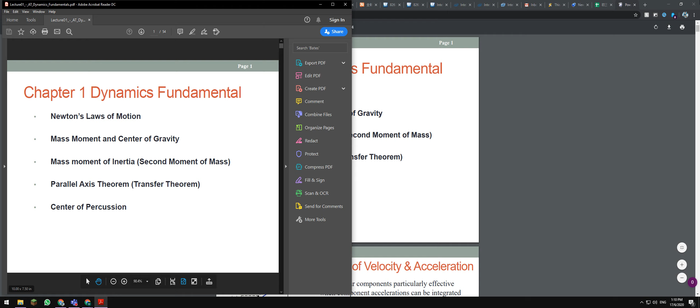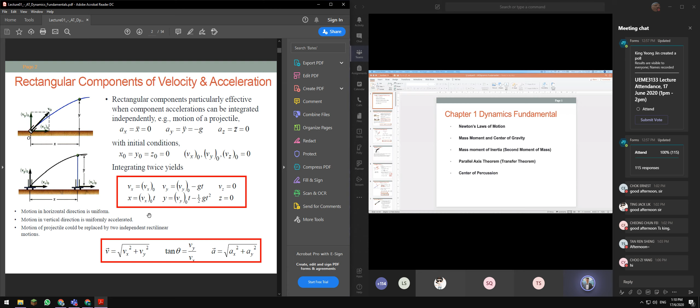Okay, so now how many do we have? 118. Okay, so we will go into our lecture 1 now. I will turn off my video just to minimize the interference. Okay. So we'll go to topic 1 now. At the same time, let me start the recording as well. Okay, this starts. Okay, so we started our recording.

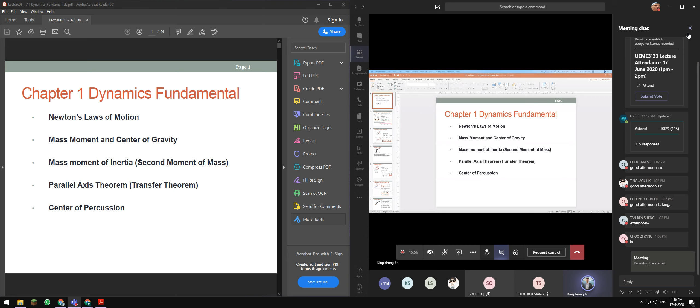Okay, so we will start with our topic 1 here. We start with the dynamics fundamentals. This is actually extracted from your dynamics course, because I believe dynamics is your year 1 subject, and some of you already learned it from the lecturers. So we can have some quick revision, because we will be using this again. So we will start with the dynamics fundamentals, then we will go to the introduction of linkages.

So let's see. Okay. So we will look at Newton's laws of motion. Maybe I activated my pen. Okay. So we will look at Newton's laws of motion. Okay. There is some technical issue now. Let me settle it first. Sorry for that.

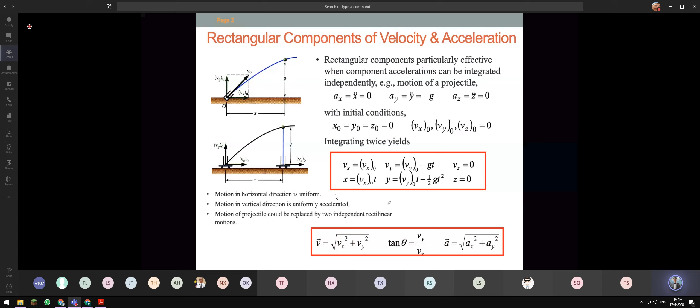Motion in the vertical direction is uniformly accelerated, that's why we have this gravitational effect. And the motion of a projectile can be replaced by two independent rectilinear motions, meaning x and y, which we solve independently. So this is what we have for projectile.

Next we'll look at the tangential and normal components. This will be very useful in our linkages, so please pay attention. We learned this in dynamics as well. When a particle moves with a constant distance from a point C, we will be able to find the relation between its velocity and acceleration. The velocity vector for the point P is V, or we can write it as V e_t, where t represents the tangential component.

So it means that if the radius here is constant, meaning the radius doesn't change, there will be no normal component. So we only have a velocity and a tangential component. That's why if you solve this problem under tangential and normal components, the velocity only has a tangential component and no normal component.

But when we go to acceleration, it will be slightly different, because if we differentiate the velocity with respect to time, we will get two components: a normal component and also the tangential component. I will not go one by one over the derivation. If we go all the way to the final result at the bottom, you'll find that the acceleration is dv over dt at the tangential component, which is this part, at.

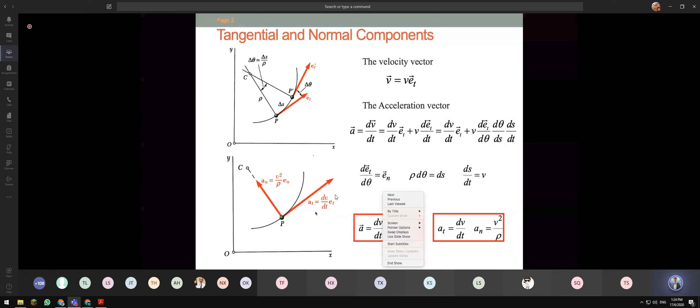Now we look at one of the sample problems. We have a car making corners at 60 miles per hour with a radius of 2,500 feet. Some may ask why we are using miles and feet. The reality is when you graduate, if you work on projects under the US, you may still have to work with miles, feet, and pounds. Just because Malaysia uses SI units doesn't mean you will only deal with SI units. It depends on the project, so you may experience people giving you imperial units.

The question is: a motorist is traveling on a curved section of highway at 60 miles per hour. The motorist applies the brakes, causing a constant deceleration rate, so there will be a deceleration in the tangential component. Knowing that after 8 seconds the speed has been reduced to 45 miles per hour, determine the acceleration of the automobile immediately after the brakes are applied.

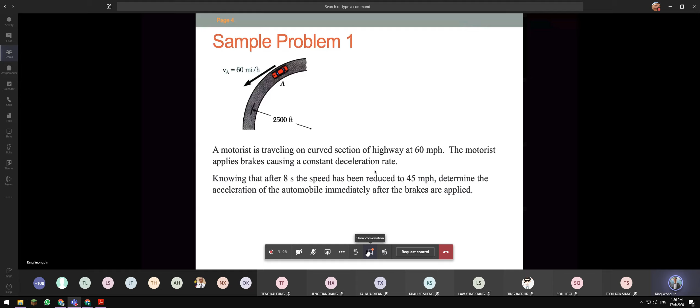So how are we going to solve it? First we have to digest all the information. It gives us 60 miles per hour. Because our radius is in feet, we convert it to feet, and it becomes 88 feet per second. This is the standard unit used in imperial. For SI units, we would have kilometers per hour and convert it to meters per second, the more standard unit we use to solve problems. So this is the initial velocity. Then it decelerates to 45 miles per hour.

It's equivalent to 66 feet per second. Okay. So we can calculate the deceleration here. Right? So because of deceleration, your motion is counterclockwise. When you say deceleration, that's why your acceleration is clockwise. Deceleration will be opposite the direction of the motion. So don't draw the same direction as the motion, then that will be acceleration instead of deceleration.

Okay. So we can calculate the A tangential and A normal. So A tangential is just the acceleration. Because it's deceleration, the final velocity minus the initial velocity divided by the time taken. So we have 66 minus 88 divided by 8 seconds. So when they say deceleration, you also have to make sure that the value you get is negative. So negative 2.75 feet per second squared.

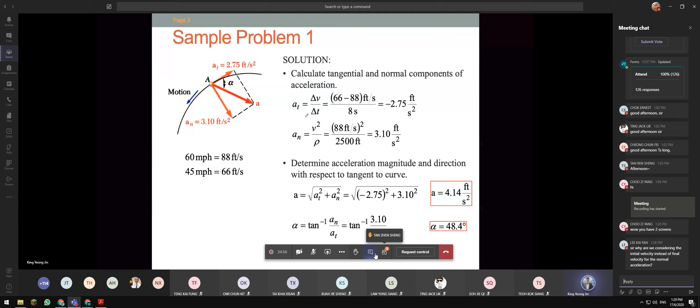Okay, I see one of your friends asked why we are considering the initial velocity instead of the final velocity for this acceleration. That is because the problem started from there, right? We want to know the starting condition when you start to apply the brakes. Because you are more interested in this process, the deceleration, not after the deceleration. So that's why we take the initial position there instead of after the deceleration. So that's why we take the 88 to solve the problem.

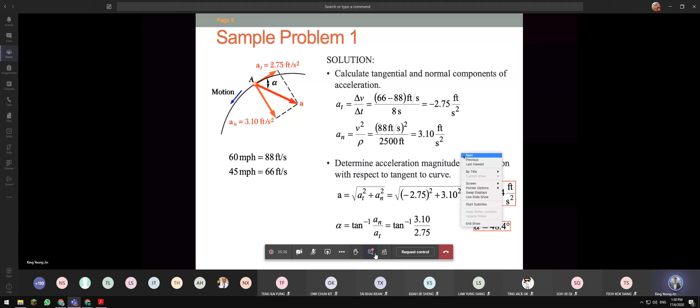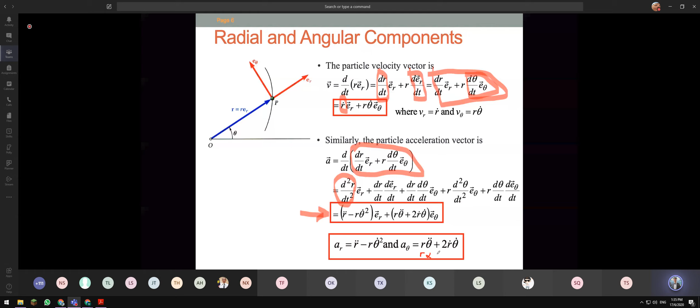So we look at another example here. The rotation of arm about O is defined by theta equal to 0.15 t squared, where theta is in radian and t is in second.

Collar B, this piece of slightly green color, slides along the arm such that r is 0.9 minus 0.12 t squared. So now you can see that it gives you r in terms of a function. So when it gives you this, it means that r will be changing according to time. That's why we can also say this is r bracket t, meaning r as a function of time.

So after the arm has rotated about 30 degrees, we want to determine the total velocity of the collar, the total acceleration of the collar, and the relative acceleration of the collar with respect to the arm. So now let's see how we solve it.

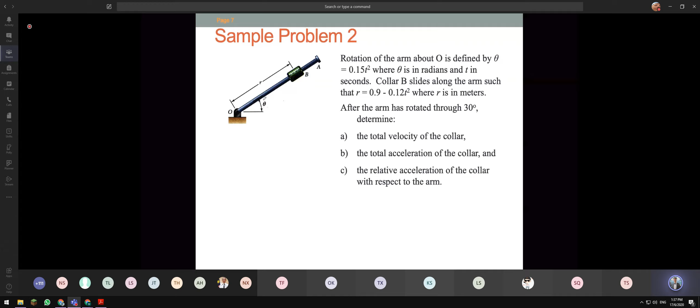So we want to evaluate the time t for theta equal to 30 degrees. Because it says 30 degrees, we have this equation here, which is theta equal to 0.15 t squared. That is a function given to you, the movement of the change of position with respect to time. So we can substitute theta as 30 degrees.

Then it's better we change to 0.524 radian, because we always use radian to solve these problems. Then from here, you substitute in, you'll find your t is 1.869 seconds. So there's the time required.

Then we can use the r function that is given. So r equal to 0.9 minus 0.12 t squared. We can substitute the 1.869 into this formula. Into here, we substitute this t, and we'll get r is 0.481.

So if you want to find velocity, you just differentiate this with respect to time. So you do dr over dt, then you'll get negative 0.24, because when you differentiate with respect to t, this will become 0, so we're left with this. So we get negative 0.24 t. Again, you just substitute 1.869 into the formula, and we'll get the velocity as minus 0.449.

Then if we differentiate this again with respect to time, we will get the acceleration. So now acceleration is a constant value of negative 0.24 meter per second squared. Since this is r, a radius, the units will be meter per second, and meter per second squared.

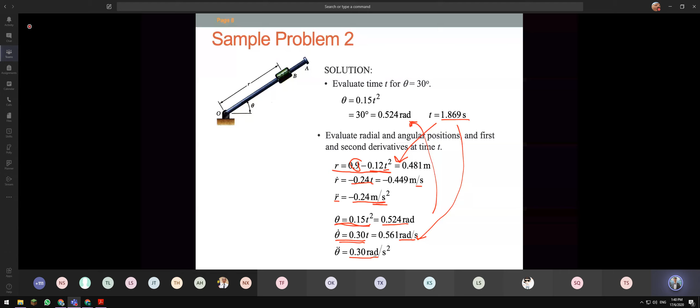So basically, once we get all this, we can substitute into the formulas we have for VR, V theta, AR, and A theta. So this is what you have to substitute. Then we can find the resultant using the formulas and the respective angle.

So it is always safe, it will be safe for you to draw the diagram. I think for this one, because we are interested in the velocity of this collar, you draw this diagram, then you also specify where your angle is. So because here you can see beta, you take it over here.

So that's why for the inverse tangent, you take this component divided by that component. You don't have to memorize this equation, you just sketch it out. You know this is the angular component, this is the radial component, it goes this direction because of the minus. So you take this one over this one, take the inverse tangent, and you get the angle. As long as you can draw this, you don't have to purposely memorize which one over which one. If you draw your own diagram with theta marked differently, I will mark it as correct as well. But if you don't draw this diagram, you have to follow my marking scheme.

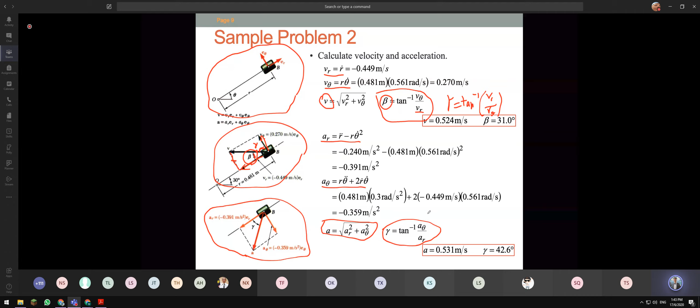So then we can find the relative motion. Motion of collar with respect to the arm is rectilinear and defined by the coordinate r. The thing is, if we now consider the arm or the bar here is stationary, what happens to this collar? This collar will only move with a velocity along the bar, because the angular motion is the same as the bar.

So when we say the motion of collar B relative to the bar, then you only have the velocity. Just like when you have two cars driving on the road in the same direction, one driving at 80 kilometers per hour, the other at 60 kilometers per hour, then you can find the relative velocity. It's about 20, meaning the car at 80 kilometers is actually only 20 kilometers per hour faster than you. So this is relative motion.

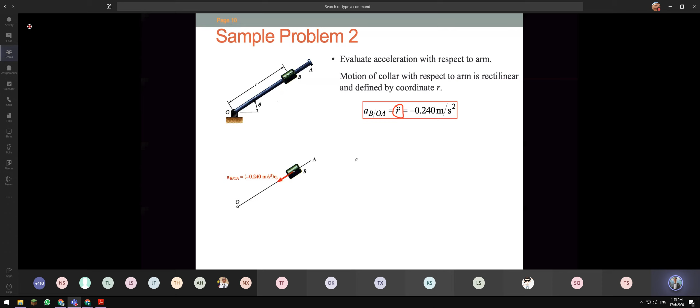Maybe let me finish this one, then we can end our class. So, absolute and relative velocity in plane motion. Moving from particle motion to this one, we always call it rigid body motion. If you still remember from your dynamics class - I can still remember some of the terms because I taught dynamics, if I'm not mistaken, about 7 or 8 years ago in UTAR. Now it's taught by other people because I moved to teach the year 3 subjects. So this is rigid body motion, or we call it plane motion.

So for example, when I look at this diagram, I also think of it as a potato. When these objects move freely, for example, if I put a measurement at point A and point B, I will measure that point A has VA here, and point B has VB at this position. So in order for us to solve this, since VA and VB are at different positions, we can decompose it and break it down into what we call translation motion and rotation motion. We can take either VA or VB as the translation - for this example, you take VA as the translation.

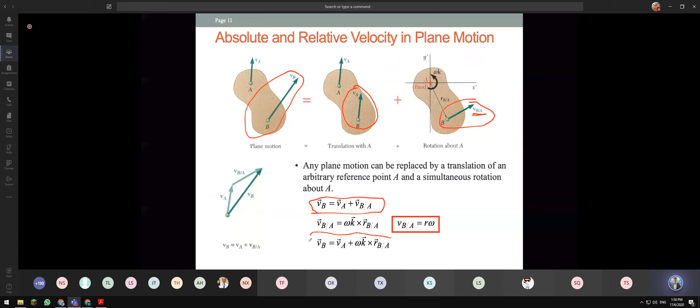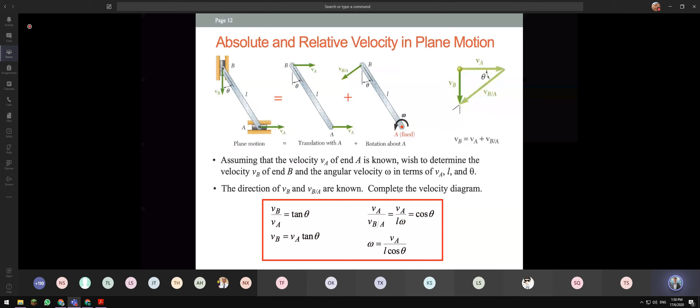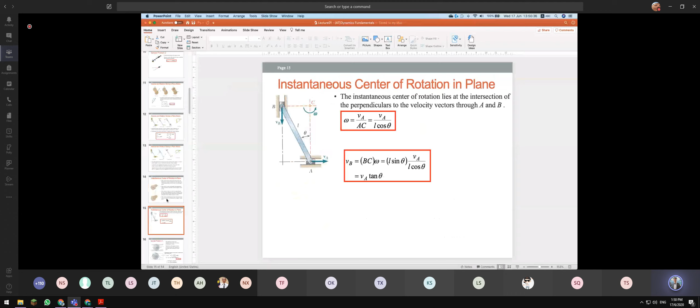What is the time now? Let me see how many slides before we end. I'll settle this slide because after this we will go for instantaneous center of rotation.

This one is still the same thing, but now you will see that sometimes you have to imagine. For example, if I pull the point A or cylinder A to the right, VB must come down. It cannot go up because this bar will not be elongated. Sometimes you have to think logically, because sometimes questions only tell you VB going down. Then by logical thinking, VA must go here. It cannot go the other side, because the bar will not be shortened.

From here, we can again choose either point B or point A to be your reference. For this example, you choose point A as a reference. That's why you have the VA translation. Then since A has become a reference, we will fix it here, and we will just find the relative velocity with respect to point A. So again, since we know VB is here, VB is here, VA is there, we can build the polygon, and we can build this formula as well.

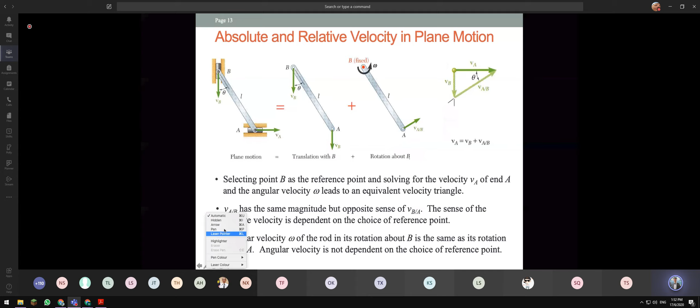We can build this formula based on this one. Now we are looking at the bottom part here because point B is the reference. So selecting point B as the reference point and solving the velocity VA and angular velocity omega leads to equivalent velocity triangles. So VAB has the same magnitude but opposite sense of VBA.

So either now we fix here, we get this value, but if we fix here, you will get another value, same value, opposite direction.

So the angular velocity omega of the rod in its rotation about B is the same as its rotation about A. So angular velocity is not dependent on the choice of reference point. You have to take note of this, meaning this omega will always be the same. Either you choose point B or point A as your reference, your omega is still the same. That's why your VAB or VBA is still the same magnitude, but different, maybe you will get opposite direction only.